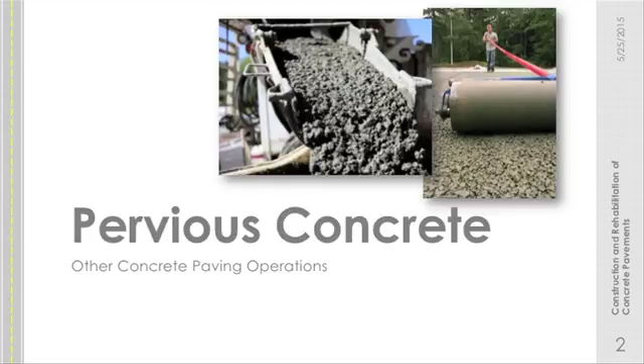So far we've talked about jointed plain concrete pavements. We're going to touch now on pervious and roller compacted concrete. Pervious concrete, if you're not familiar with it, is a concrete pavement with a bunch of holes in it. We take mid-size aggregate and coat it with just enough paste to coat the outside, essentially, to get them to stick together. But water can very easily pass through it.

Is there pervious concrete in Chile? I've seen some in Colombia. It's a niche product, really. It's not something you would use all over the place. We use it on shoulders, but it's not the most applicable thing.

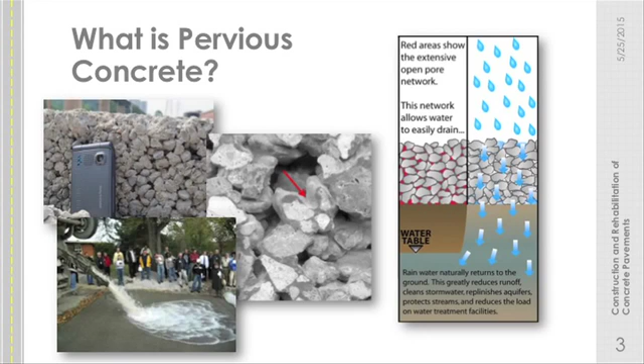It was actually first innovated in Europe for house construction. Because it has so many voids, they would form up and build a wall, and then they would basically close off the outside with grout. They had a bunch of air pockets in there, just like any other insulation, to insulate the house. That's where its roots come from.

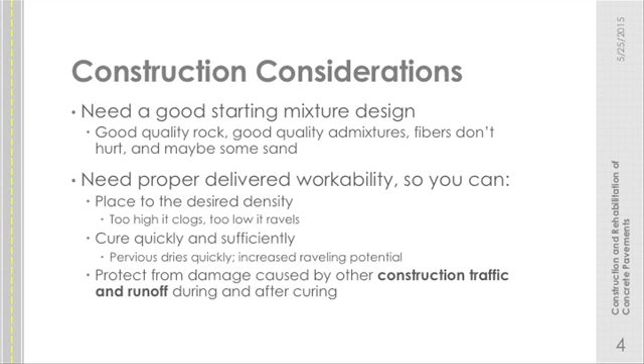With this particular type of material, the mixture design is very important, because the variation you can get with a poor mixture design -- considering the source and the ability of that source to produce the aggregate in a uniform supply -- is very important.

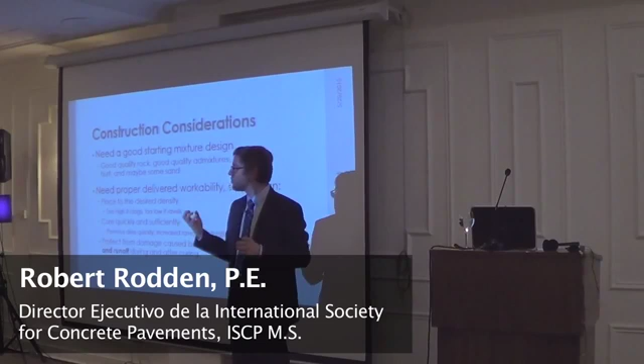Now the challenge is we're trying to place it to the desired density. If we overcompact it, or somehow place it at a higher density, it starts to lose its permeability. And because it has so many voids, there's a lot of paths for air to get into it. So if it's a windy day, we really have to protect the surface, or air will very quickly get in there and dry it out.

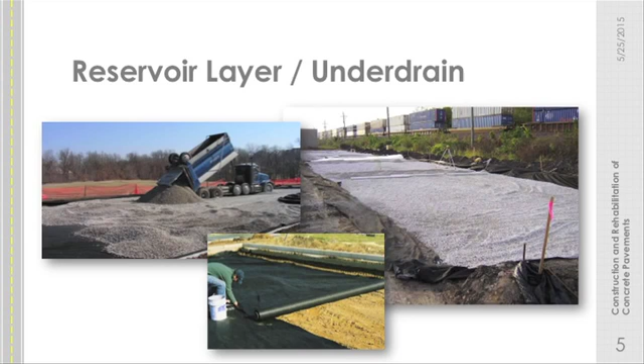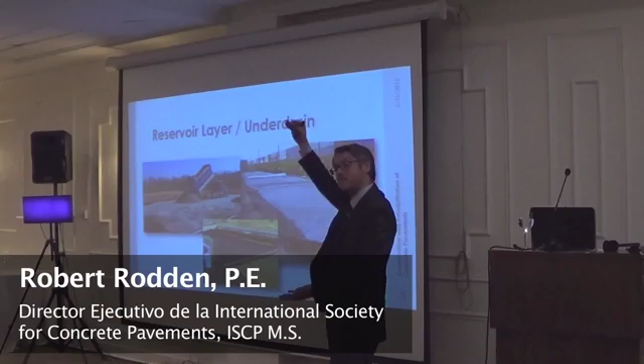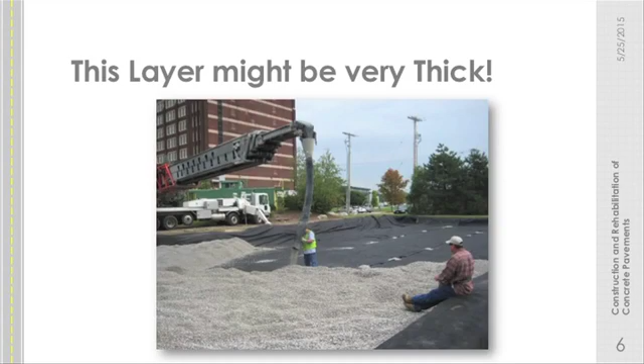When we're talking about construction of these pervious concretes, we generally have a geotextile to help separate the subgrade soil from our reservoir layer. This stone, open-graded, clean stone reservoir layer can become very thick, even several meters, depending on how much volume of water we're trying to contain while the subgrade soil processes that and allows it to go back into the water table. Here's a photo of it -- that's pretty thick, about up to there.

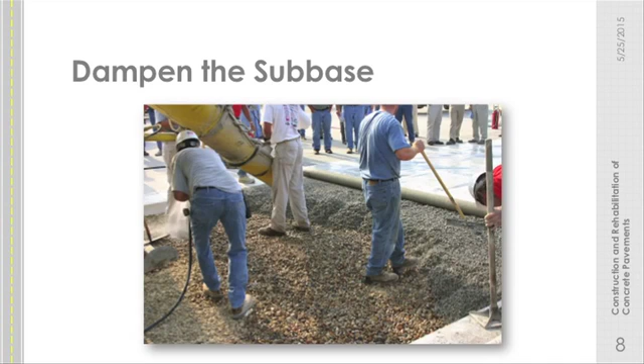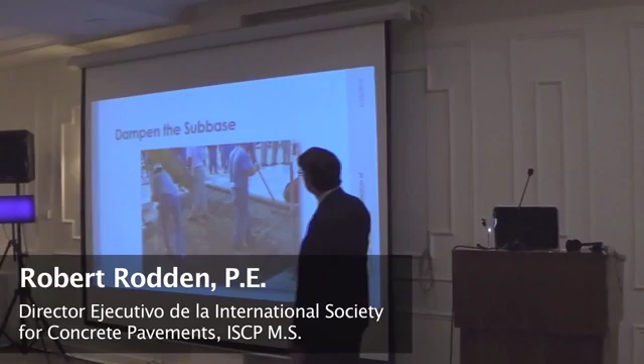But it's just like conventional fixed form paving. We set our forms -- they might be wood or metal. We use a roller screed to strike off the surface. We dampen the subbase to satisfy its water demand, then place the pervious concrete within the forms. We move it around with concrete rakes. Here they've got a tamper just to work the edge a little bit. It gets struck off and cured.

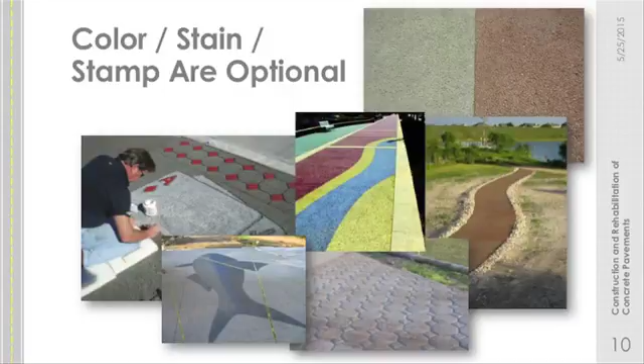Now we have to use a conveyor -- you can't pump pervious concrete, it has too many voids inside of it. We can do all sorts of stamping and coloring and architectural things, but I'm a pavement purist, and I like my concrete gray.

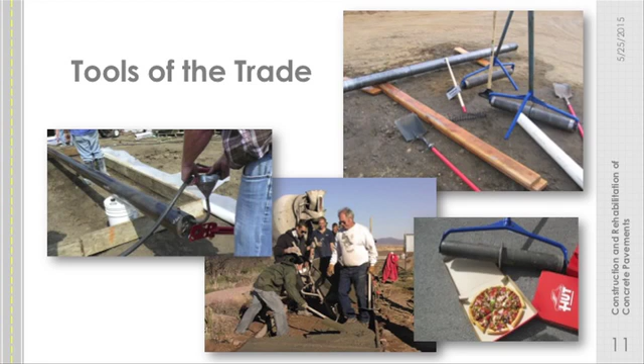But the tools that they use -- see them all right here: a square shovel, a roller screed, they've got an extra roller here, a tamping device, a rake, and here is the joint forming tool. It's not a saw -- it's what we call a pizza cutter in layman's terms. It just creates the weakened plane by moving aggregate out of the way.

So we're going to see them very quickly apply all this. They get that equipment out in the field. As I told you earlier, fill the screed up with some water to weigh it down, and in a very, very narrow window, do a lot of work very quickly.

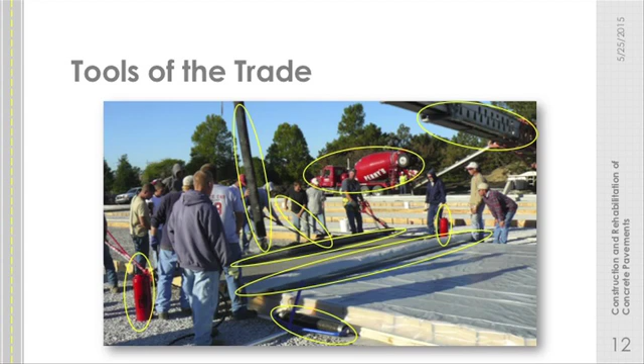It's an orchestrated dance -- this is very labor intensive. See all those people? This is not a demonstration site, this is an actual project. And there's this much labor.

They're getting the concrete -- it's being conveyed up over the top of them, spread out as uniformly as possible, so the amount of work necessary to move it is minimal. Because segregation is bad for pervious -- that's how we end up having a closed surface. They spread out the material, using a concrete rake to spread the surface only. We're trying not to have to move it.

It gets screeded off. They don't close the surface. They use a linseed oil or some other curing compound and apply a plastic cover to it, all within about a meter.

I guess 3 meters, sorry, all within about 3 meters. Here they have their saw forming or joint forming tool, so they'll peel back that plastic and form those joints. We'll see that in a second.

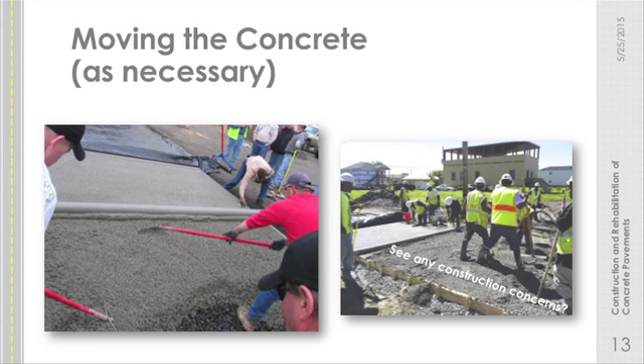So if we have to move the concrete, we use these rakes to pull it. We have a very small head of concrete rolling in front of that. We don't want to see too much.

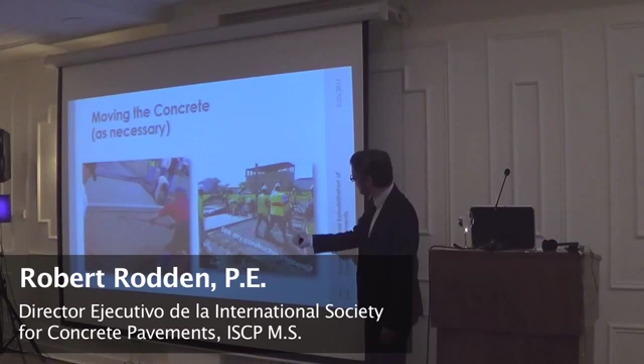In this particular photo, they're walking on top of the fresh pervious concrete. That's going to compact it, densify it, and make it so it's not pervious. So you have to stand out away from it whenever it's being constructed.

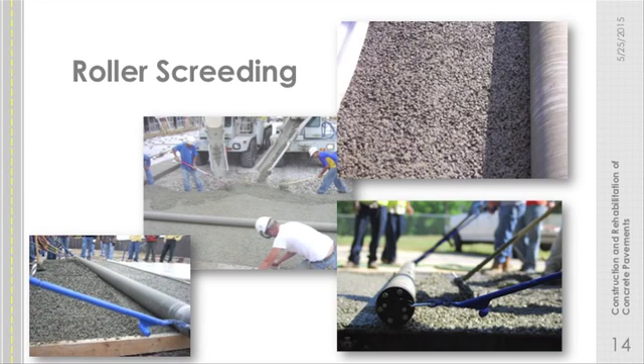Some photos of the roller screed. It's the same piece of equipment that we use for conventional paving. But we want to see a nice uniform surface there, not a bunch of closed off pockets.

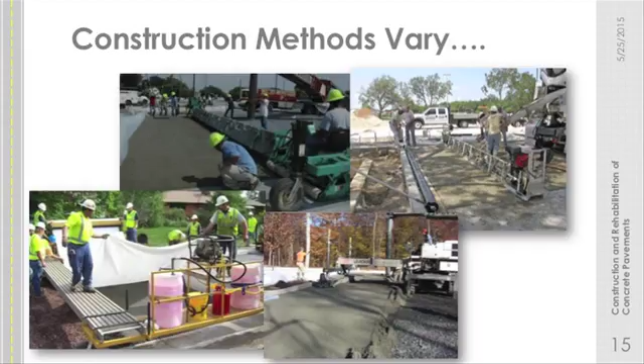Construction methods can vary. Here we have truss screeds. Down here on the right, we have a laser screed placing the pervious concrete. So there's a lot of different methods. I've even seen people pave pervious concrete with an asphalt paver. So it's pretty much any method that we use at this point. We compact it.

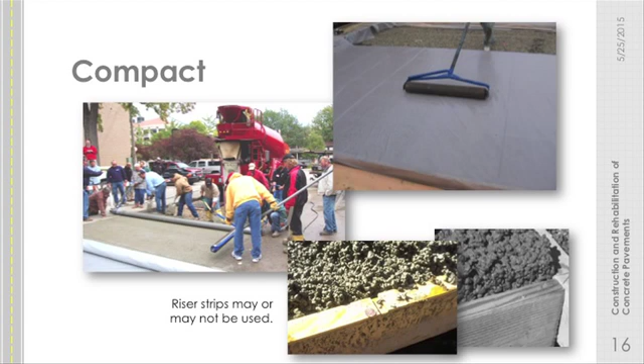And many times they won't even compact it at all. But if they're going to compact it, the easiest thing to do is to have your forms of a certain thickness and then just have thin riser strips tacked on top of that. So we finish off the surface level with the riser strip. In the bottom right photo, we remove the riser strip, so we have this much concrete sticking above our form.

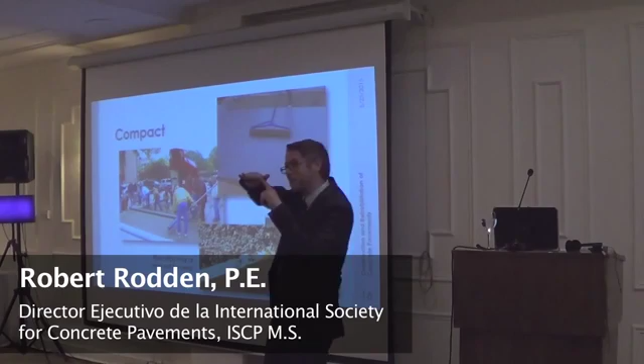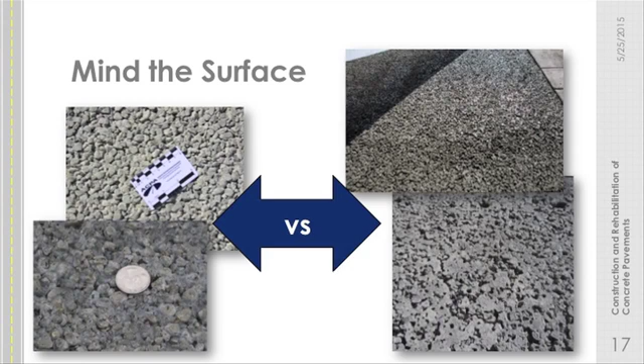Now, if that's of uniform thickness sticking above and we compact it all, we get the same density across that, as long as we don't somehow close off the surface. But we do need to sometimes compact it to get density. We want a nice uniform surface, again, not like the bottom right. We have these pockets of built-up mortar in spots that will impact its permeability and probably its freeze-thaw resistance and performance.

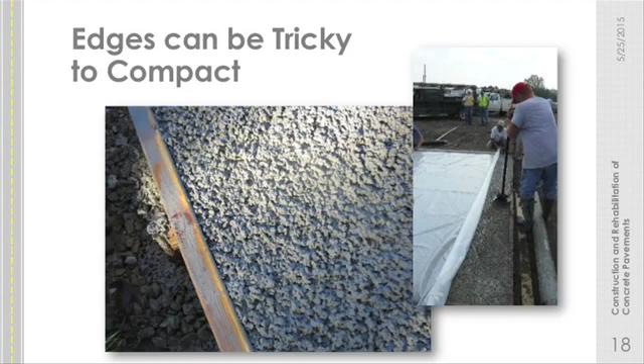Along the edges, we use a hand tamper just to make sure we get the compaction we're looking for. And they can round or chamfer the edge as they can with fresh concrete.

So that plastic cover needs to be on there in about 3 meter space. It's relatively quick.

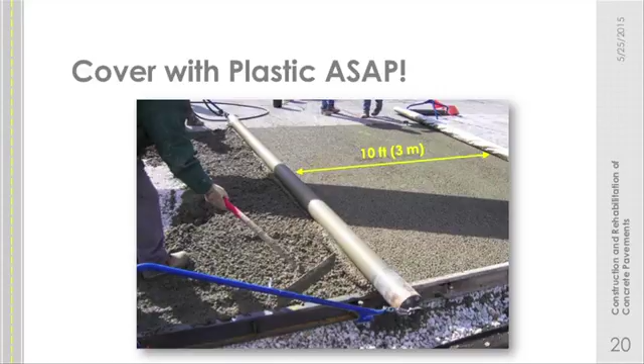So we used to not joint pervious concrete at all, and then everybody started jointing it to make it look more like conventional concrete. I think now we're back towards not jointing it as much.

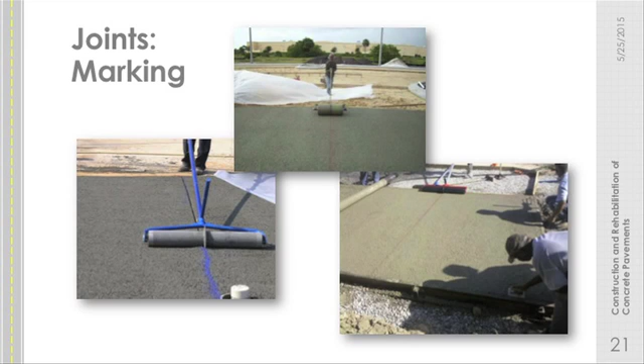If you're not putting steel inside the pavement, how important are joints? Unless you intend to maintain them. In pervious, the design life is not 30 years. Nobody thinks we're going to get 30 years out of this solution. So it'll probably be removed and replaced. But pervious concrete, from a design perspective, will not fault. It's just impossible for that mechanism to happen. So having a crack versus a joint, there's really no reason to be concerned about a crack.

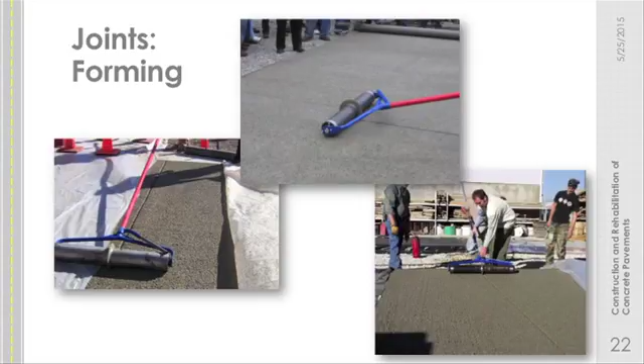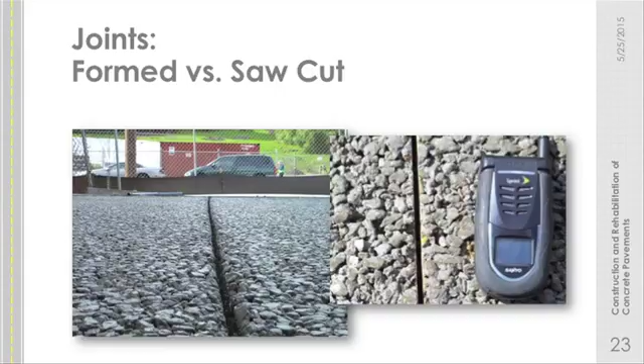Some more photos of joint forming. We are now saw cutting pervious concrete as well, using the same means as with conventional concrete. There was a lot of concern early on that that might cause a lot of raveling or other performance problems. That hasn't been the case. It can be saw cut just the same.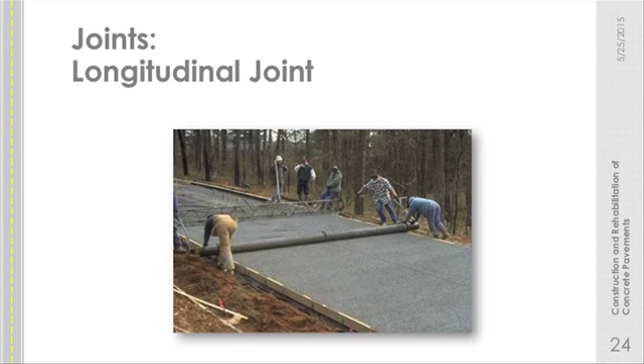For longitudinal joints, if the section becomes wide enough, you can place a longitudinal joint with a pizza cutter form on the screed.

That's a roadway to, what's that to? It's like a veterinary clinic.

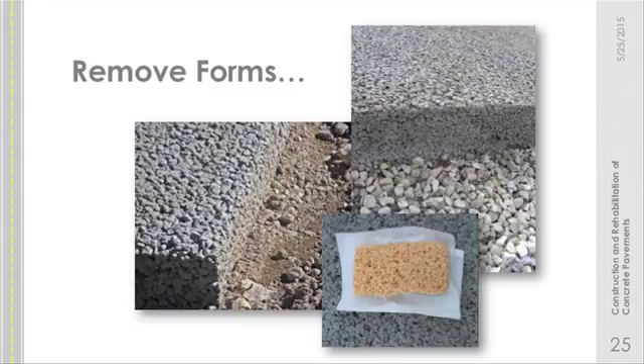Once we remove the forms, we really see that it is pervious. It looks like a Rice Krispie treat in nature. Water can easily pass through it.

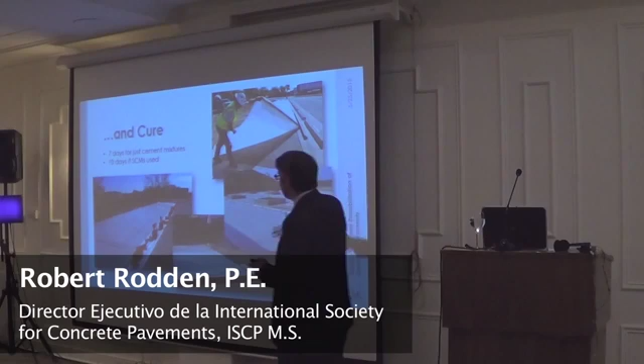And then we have to cure it. Now we have to cure this for 7 days. There's no way around it. If we're using SCMs or fly ash or slag cement, we need to cure it for about 10 days. So it needs to be covered on all sides, not just the surface, but the exposed edges as well.

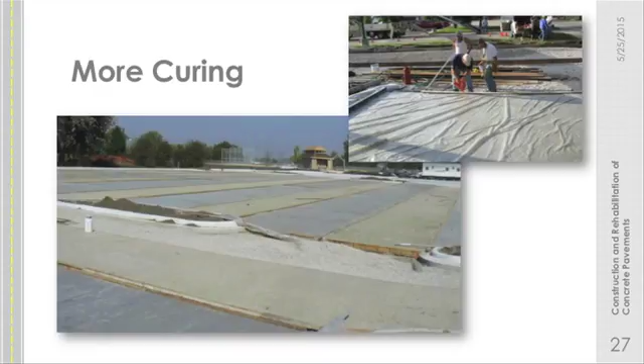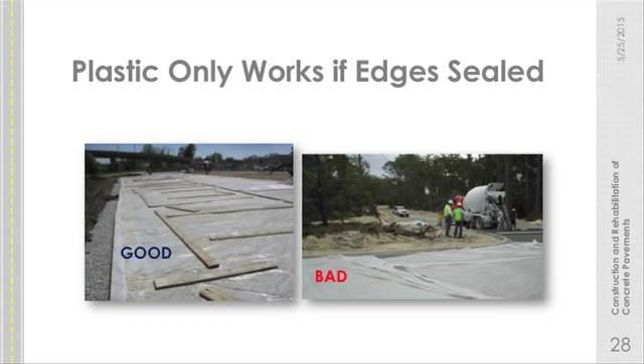Some more photos of curing on a pretty large project. So we're seeing this more for parking lots, low volume roads. We've used it some on highway shoulders, but it is still relatively not that common compared to conventional concrete.

Photos of good practice on the left, plastic's weighed down, it's not going anywhere, and bad on the right.

I think of some of the more innovative applications. We have a big parking lot at a university where the architects decided this was something they wanted to do, and the civil engineers found out how to make it happen. The parking lot is pervious concrete, and it captures rain, which is used to flush the toilets inside the stadium. It's not a typical pavement approach, but it has benefits from other perspectives.

Now we'll switch and talk about roller compacted concrete. I see this as the future in a lot of regards for concrete pavements in the world. It uses asphalt paving equipment to build concrete pavements. Everyone has asphalt paving equipment. Not everyone has slip-form pavers and other concrete equipment, but this is really catching on globally. Once we get the issues all resolved, I think it will catch on even more quickly than it already has.